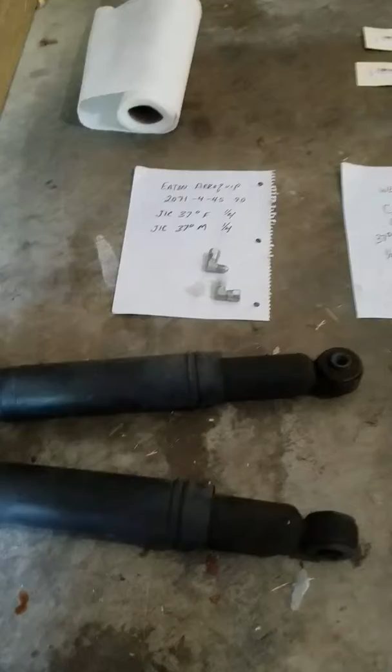This is to let people know that there's an alternative to using this plastic kit that came with my air shocks, the Monroe MA828 for a 2001 Chevy Silverado. I didn't want to use this plastic. I wanted to change over to stainless steel 1/4-inch hose, and so everything I bought was from off of Amazon.

Here's the part numbers for the hoses. I got two 30-inch, and then the 48-inch. The 30-inch are the ones that come off the shocks to the T, and then the 48-inch is the Schrader valve to the T. 48-inch, and that's more than enough underneath the truck.

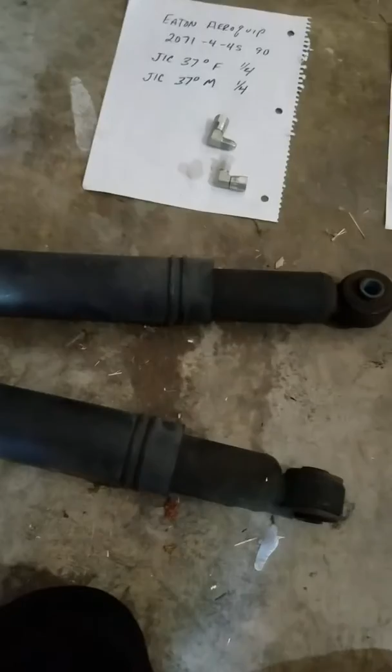Okay, so here's the old shocks. They're supposed to be gas shocks. One doesn't even extend. One extends real slow.

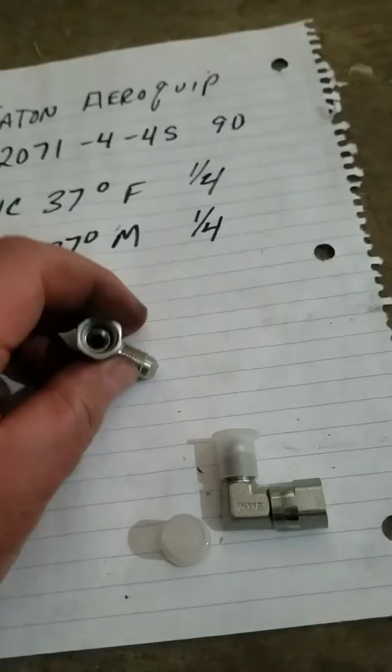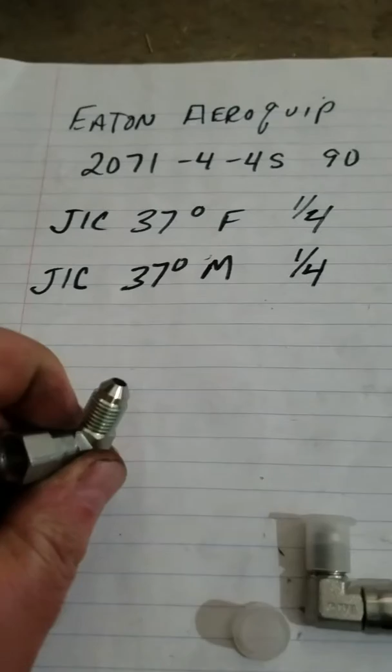So the fittings on the air shock itself, the MA828, and it's probably the same for all of the Monroes, this is what I used. Okay, it's the Eaton Aeroquip 2071-4-4S at a 90 degree. 37, there's the female to the male, because both hoses I have, both ends are female on female, and they are all 37, the JIC fittings.

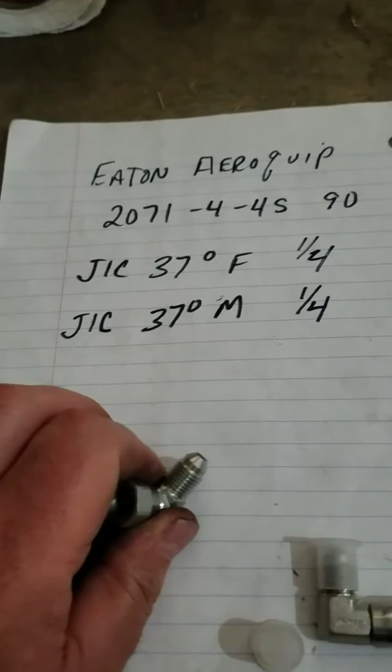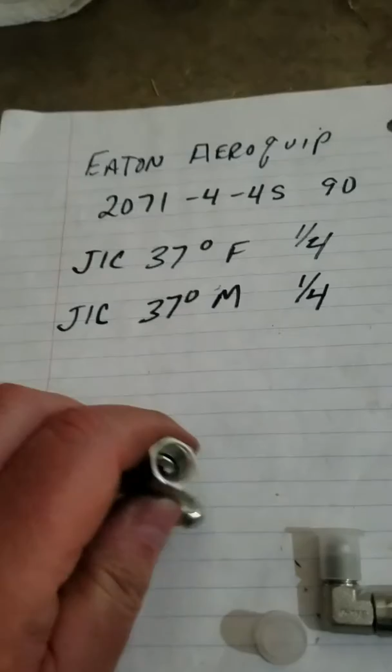So the fitting on the shock itself is not JIC, okay, and I was kind of worried about that, maybe not connecting with this female, but it seemed to have held pretty good. I cleaned it with some alcohol, and then I had some yellow tape, and I also got some of this. Now this stuff doesn't seem to dry, it stays wet, so I switched over to the tape.

So part of it is some of the Permatex, and the other one has the yellow tape. Yellow tape is for gas, so if you're gonna need the gas. And it says on JIC valves you don't need it. You don't need tape, but I did it anyways.

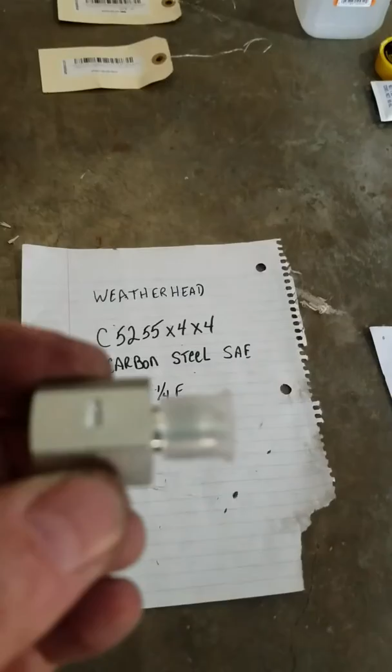And then the other is where this male goes into the female hose in the back of the truck, and this end goes into the Schrader valve, and that's a Weatherhead, and that's the C5255 by 4x4. It's a 37 degree JIC 1/4-inch female right there, and there's the male. Okay, that's the part number.

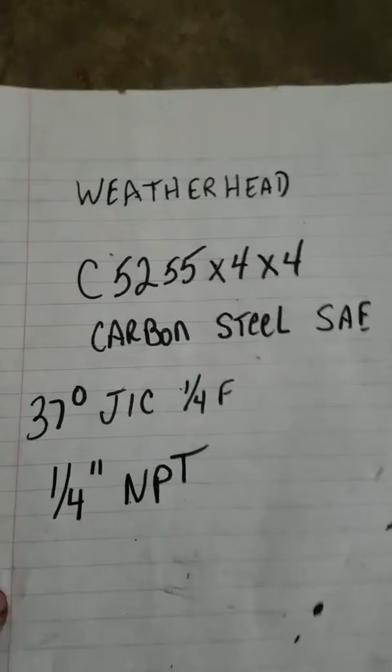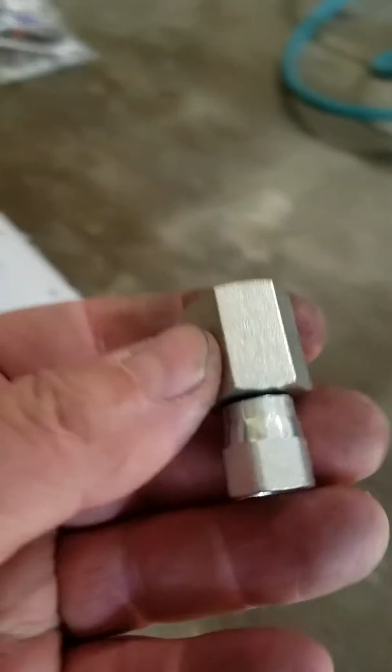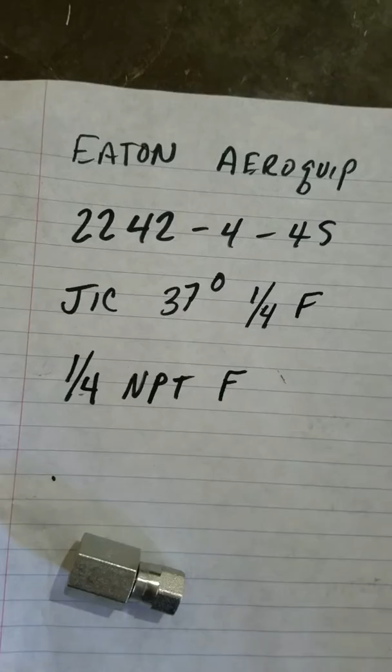All right, so now you can use these as well if you want to switch over to a larger fitting, the normal fitting, and not use the JICs. Then this is the same end as the 90, and that part number right there is the Eaton Aeroquip 2242-4-4S. The S is stainless steel, I'm assuming. JIC 37 degree. It's female, and both ends are female.

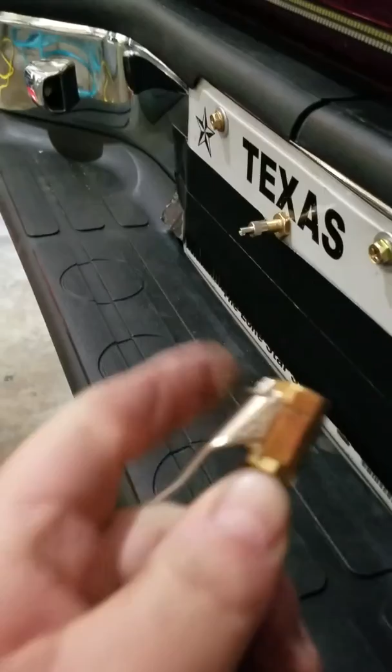Okay, now the back of the truck. Now I tried it two different places. The Schrader valve comes out. I had to move it. I had it here, and I didn't want to drill a hole in the truck, so I just put it center in the license plate right there. Because when it was here, it wasn't long enough. I didn't have enough to get the air valve on there. This wouldn't go all the way on because this is too thick. Okay. Now let me pause this for a second to get under the truck, and I'll show you what I did.

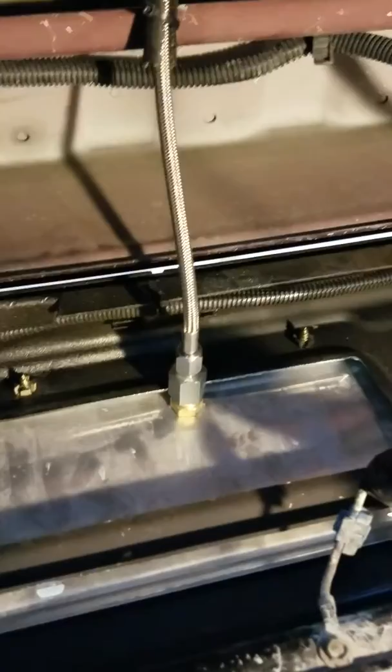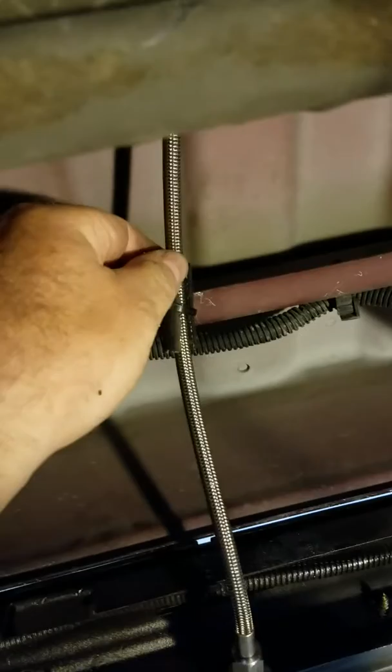Okay. Now there's where the valve comes out. There's a Schrader valve there. And then there's one of the parts, and this is the stainless steel hose. I ran it through here. I put a zip tie on there, right there, and I put a little piece of rubber hose so, since they're metal, I don't want to hear them clanking or scraping while I'm driving down the road. Okay, so I ran that up under the tire, and it comes out over here, and there's the T.

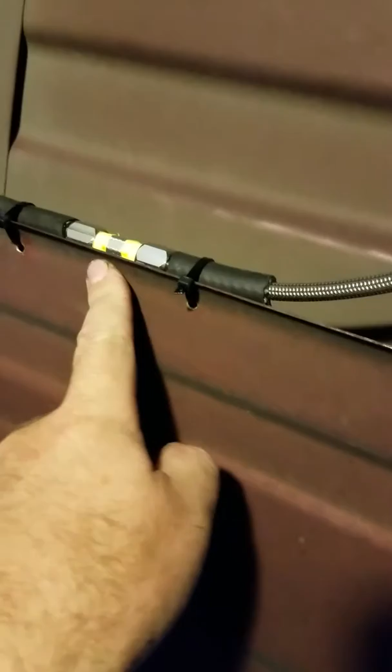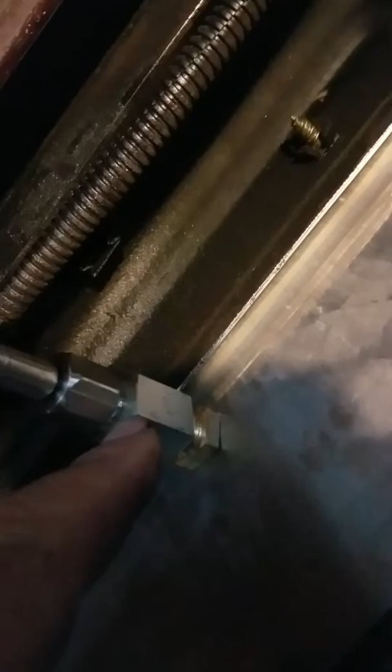All right, I can't really see it, but I put rubber. Hold on a second, let me move this light. There, the T. So this is from the back of the truck. The excess goes underneath here, and then the T is right here. I wanted to use as little amount of connections as possible. As you can see, there's yellow tape here on these. The yellow tape on this one, and then this one, I don't know if you could see it, is the Permatex. All right, right now I have 120 pounds in here. I'm not going to run it at 120, but I wanted to pump it up to see.

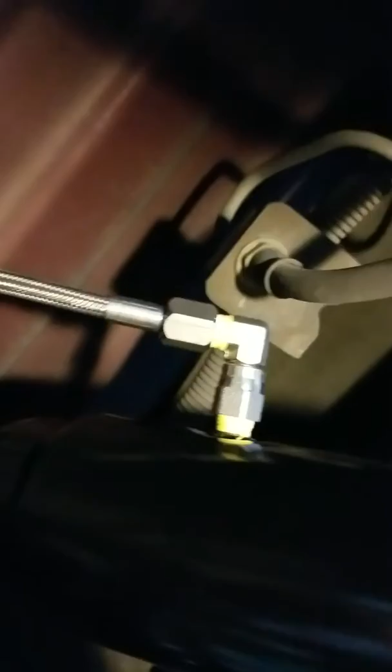And then this light's making too much of a shadow. And there's the 37 degree. There's two tapes, so I put tape on that and tape on that and ran this up. And there's a hose up under here. I zip tied it to that. Okay, now the other one, and see, there's the shock. Alright, so the other one, let me pause it for a second.

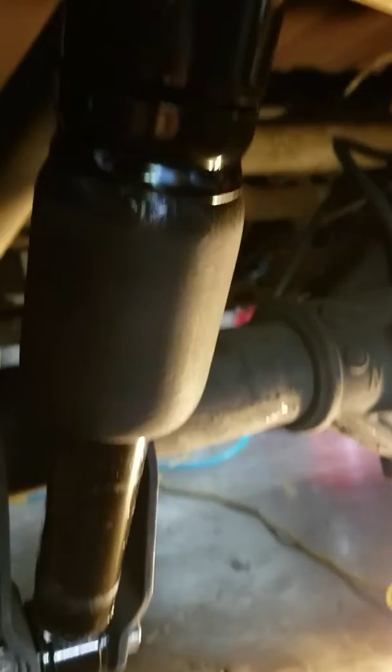Now the right side is, I put the 90 degree there, and it runs up over here. And I put a piece of rubber hose here. I try to keep it as far away from the exhaust pipe as possible. I didn't use a plastic zip tie. I used some metal wire for that one, but I put the rubber there, and then it comes.

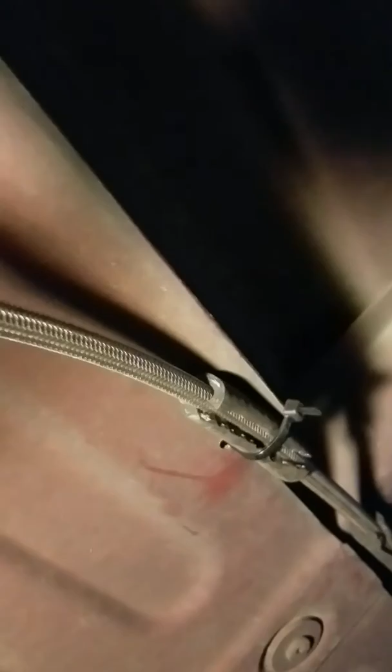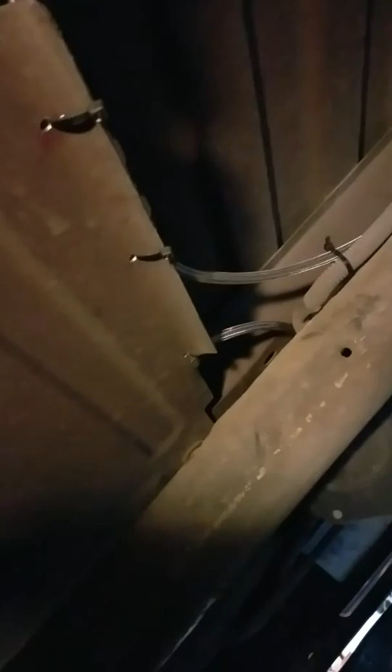Oh man, let me see if I can get it better. Okay. Oh man, this is terrible. There it is. So then that comes there, drilled a little hole in the heat shield, zip tie to put that rubber there, and then it goes back, and there's the T, right there, where those two zip ties are.

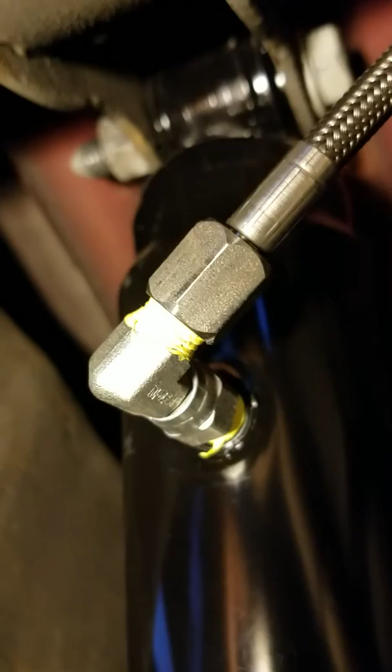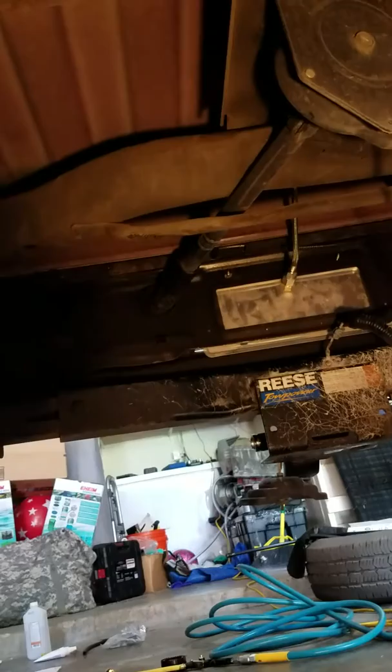So all in all, I have the 3 stainless steel hoses, 2 of these fittings, the T that's right up under there, and I used yellow tape on those, and then it goes all the way to the back right there up, so the tire won't touch it. And then there's the other fitting that goes from a JIC to the normal for the male Schrader valve.

And it seems I have no air leaks, and I believe this will last much longer than that plastic hose, and it's 1/4 inch. So like I said, I've filled it up to 120. It's been holding. I got no air leaks. I would definitely recommend JIC. Some people say you don't need tape or the Permatex. Some people say you do. I just put it on there just in case, and it seems to have worked. You just got to keep the tape off the 37 degree angle fitting, because it's metal on metal.

So I hope this helps. Oh yeah, and remove the spare tire, because if you get that spare tire out of there, you got a lot more room to work with. So I'm going to take this for a spin and see what happens. Okay? Alright, maybe you want to do it this way too. It's a little more expensive, but I think it's going to last a lot longer.